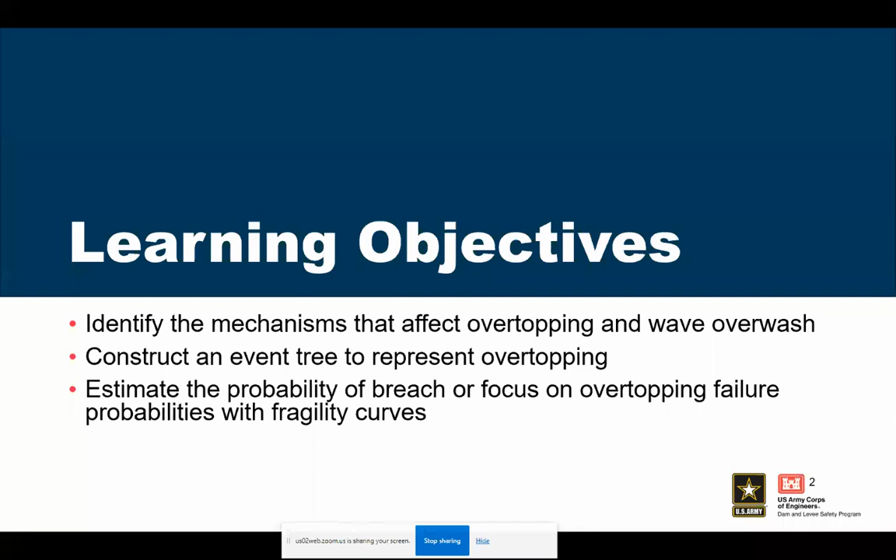So failure of dams and levees due to overtopping, it's a pretty common failure mode. This indicates it composes about 30% of dam failures in the US. But I think internationally, that's probably closer to 50%, at least according to what Robin Fell put together based on a bunch of dam history back in the late 1990s.

So we'll discuss key factors such as overtopping depth, duration, and dam materials. So embankments that have overtopped by a few inches to any more than a foot, or about 0.3 meters, have performed well, but others have failed quickly. And that depends again on the depth of overtopping, the duration of overtopping or overwash, and the materials that the dam is actually made out of.

So many older dams and levees have been designed for floods that no longer really represent a remote flooding event, and design estimates have increased. Everything in engineering progresses and moves on with time, and hydrology in particular can be affected by that. So back when things were designed in the 60s, the 70s, sometimes as we get more data about actual weather events and floods, we understand the likelihood of loading better. And so that means that some of these dams may be under-designed and may be more likely to overtop.

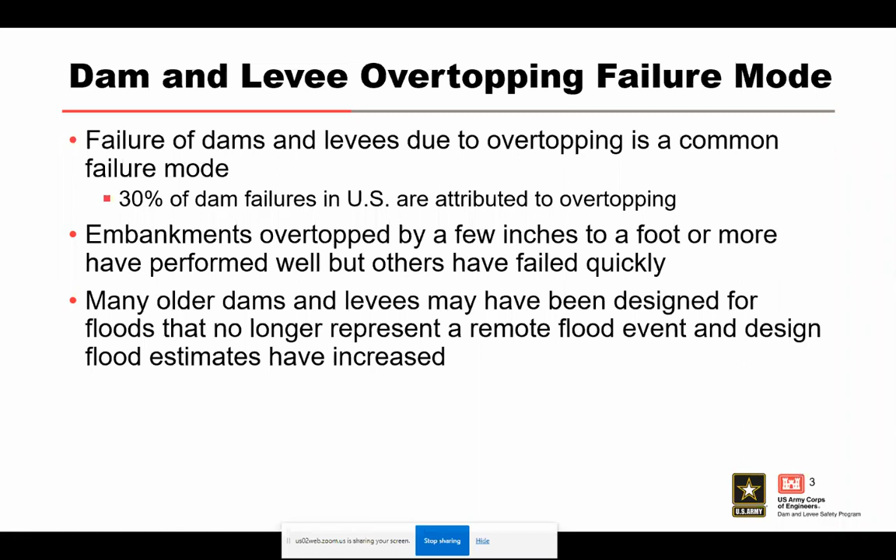So let's talk about a couple of case histories here. This is Lake Delhi Dam near Delhi, Iowa in the United States. It failed on July 24th, 2010. One spillway gate was not operational during this event. So you can kind of see it—let me get my laser pointer here. You can kind of see right here, these two gates are up, but this gate is closed.

And so the dam also underwent internal erosion. We're not really sure about the specifics of that, but it also overtopped this section right over here, a 200-foot portion of the earthen embankment and the roadway, which led to breach and emptied the reservoir.

So this was not a huge dam, it was about 4,000 acre feet—I should have had those numbers in cubic meters, but it's a small dam, relatively speaking. But you can see as this area was overtopping here, kind of, you can see another view of it overtopping here. And this is the same section after it failed. So you can see there was a pretty significant erosion event here. No life loss occurred, but about 8,000 people were evacuated from the downstream area.

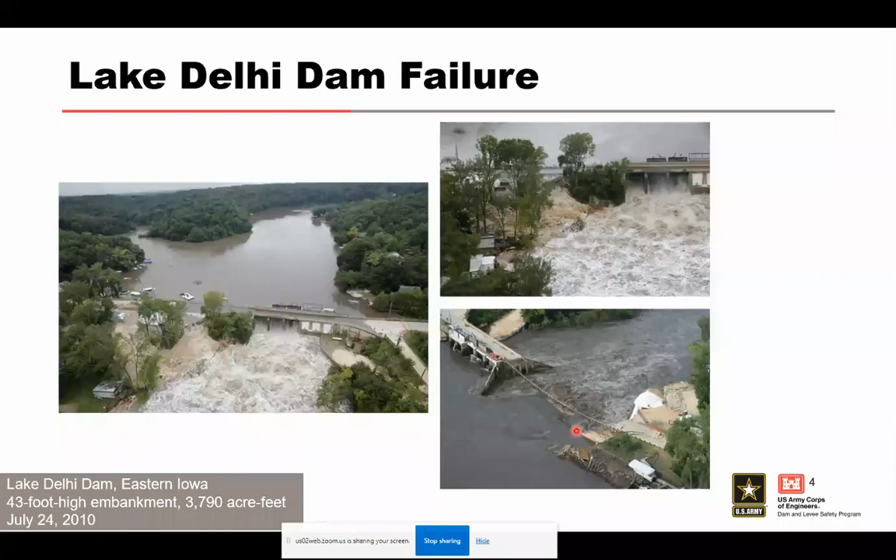This is Auburn Cofferdam. So this was a cofferdam actually constructed in California to build a concrete dam that never actually got built. In early February 1986, 10 inches, or about 25 centimeters, of rain fell in the Sacramento region in just 11 days. And it melted a lot of the snowpack in the Sierra Nevada mountains and caused a huge flood to pour down the American River.

So rising water overtopped the cofferdam near the right abutment, kind of right here, creating a waterfall, or an erosive overflow that quickly eroded into the structure. Although the cofferdam was designed with a soft earthen plug to fail in a controlled manner, if any such event were to occur, the structure eroded quicker than expected.

So breach outflow surged downstream into the already spilling Folsom Lake, which is another dam less than a mile downstream, deposited the cofferdam debris in that lake, and raised the lake level very quickly. Folsom Dam then started to move water through the spillway, and outflow reached 134,000 cubic feet per second, which is a ton—I should have got that into cubic meters per second, but it's a lot, which exceeded the design capacity of the levees through Sacramento. But the levees were fortunately not overtopped, and severe flooding in the city was averted by a very close margin.

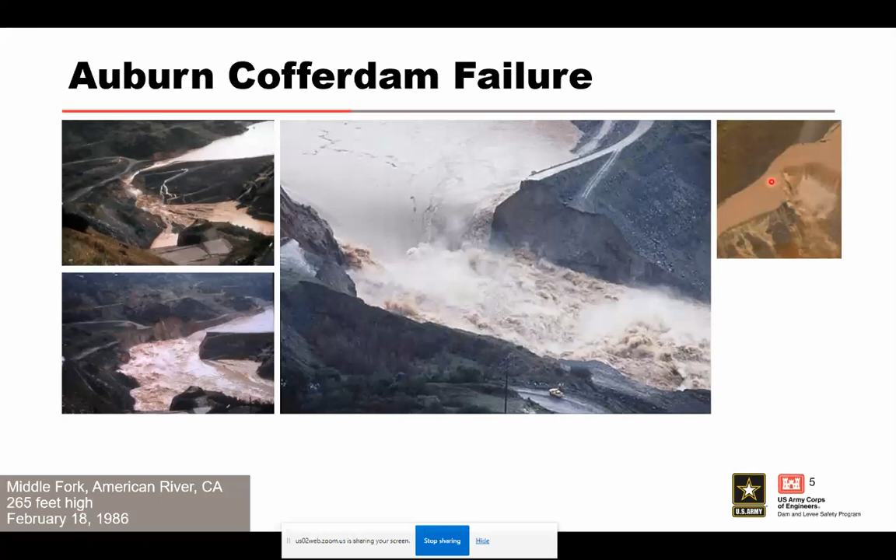And I think this is an aerial view, the remnant section here, and the actual flood. Pretty significant failure here. So this is Taum Sauk Upper Dam, an upper reservoir of Taum Sauk.

So it's a pump storage dam. Essentially water doesn't flow into this naturally. It's actually pumped up into it from a stream offsite that's used for water supply for the people who live in the area. It was overtopped when water continued to be pumped from the lower reservoir after the upper reservoir was full. So you got to ask yourself, how does something like this happen? It was a pretty crazy series of events that led to this, and it eventually led to the catastrophic failure of a triangular section of the reservoir wall, as you can kind of see right here and over here.

The failure was a result of a combination of design and construction flaws, including continuing to operate the dam when the primary system for gauging the water level was known to be inaccurate. Specifically, the gauge pipes, which measured the water level, had become detached from the reservoir wall, so they were kind of moving around. That moved the fail-safe secondary gauging system above the actual height of the dam to avoid false positives, which would cause a premature stop of pumping into the reservoir, and operating the dam in an unsafe manner by routinely overfilling the reservoir. There was no overflow spillway in the original reservoir, so there was no place for the water to go once it did overtop.

After this thing breached, no one was killed, but a downstream park superintendent, his wife, and his 3 kids were swept away while still in their home. So this is a really remarkable thing. We never would have thought that that was able to happen, but literally the house was picked up from its foundations and floated away while it was still intact. And so no one was killed, luckily.

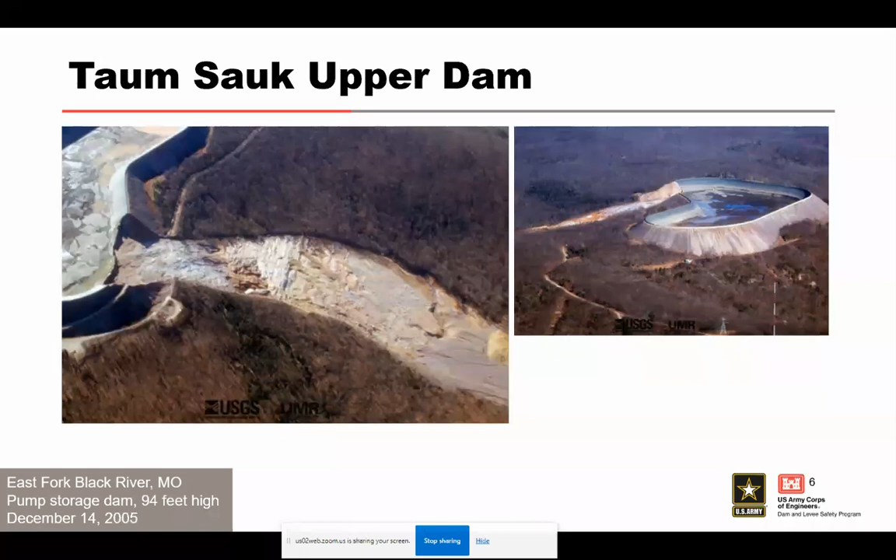Here is another one. This is Rainbow Lake Dam failure. It failed in September of 1986 due to extreme rainfall in central Michigan in the United States. So Rainbow Lake Dam failed due to extreme rainfall.

The dam was 46 feet tall. So that would be, what would that be? That'd be like 12, 13 meters, maybe 14 meters. And it's about 800 feet long, or let's say about 270 meters long, and had a 10-meter wide crest with 4-to-1 slopes and a rectangular drop inlet spillway, but no emergency spillway.

It was constructed of well-compacted sandy, silty clay. So that's an important part of this. There was sand in there, there was silt in there, which are erodible materials. But there was also clay in there, which has a lot of erosion resistance associated with it, and a little bit of coarse gravel. But eventually the dam failed after being overtopped for 14 hours, with a max overtopping depth of about 1.5 to 2 feet, or somewhere in the zone of about 0.4 to 0.6 to 0.7 meters.

An eyewitness stated that the erosion, which resulted in the breach and failure of the embankment, started in an area where vegetation cover was sparse or non-existent due to the presence of a road or trail angling down the downstream side of the embankment. So that's important to note. The grass cover on embankments provides a really robust armor for the embankment itself. So if you look close at this photo right here, you can see some of these erosion rills taking place. You can see water kind of flowing down through here. And we'll see some more of that here in just a minute.

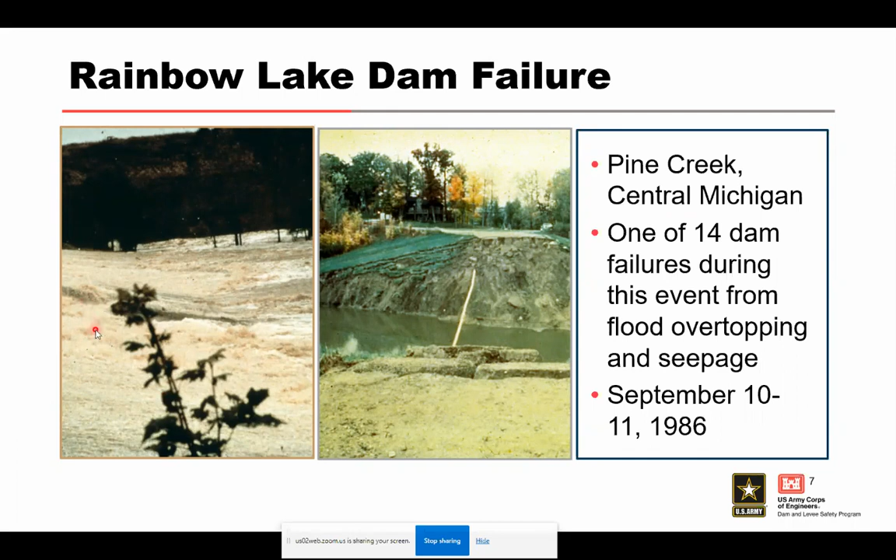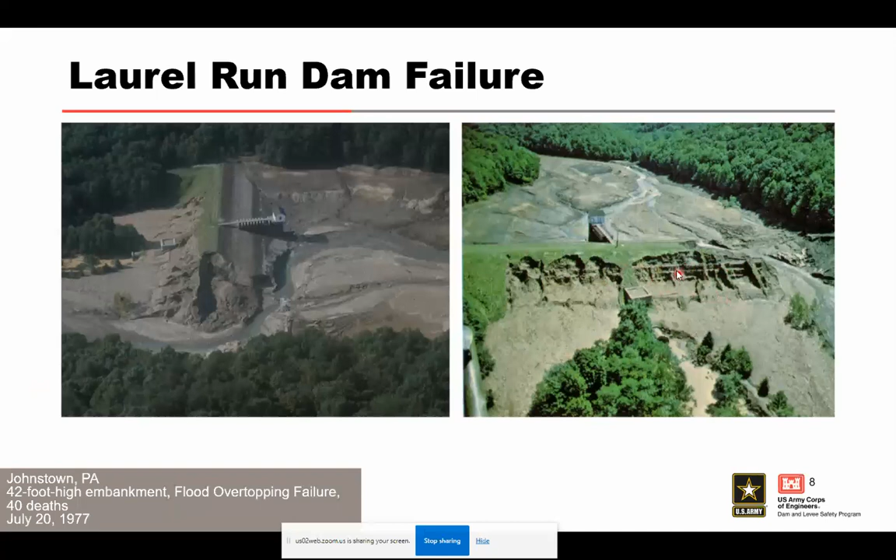Note the lineations on the downstream side of the dam. So that's what these kind of weird things are right here. Those are actually thought to be due to crib walls that made up the original dam prior to placement of additional fill later in the life of the dam. So this was the original dam, then they placed a larger dam over top of it. But anyways, just kind of interesting.

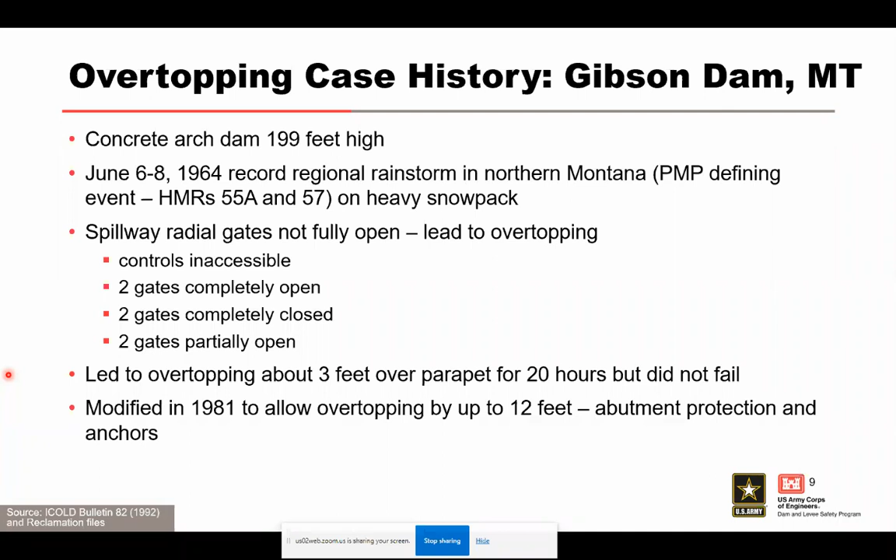So the spillway radial gates, they were not fully open, and they led to overtopping. The controls weren't accessible. 2 gates were completely open, 2 gates were completely closed, and 2 gates were partially opened. It overtopped by about 3 feet over the parapet wall for about 20 hours, but did not fail.

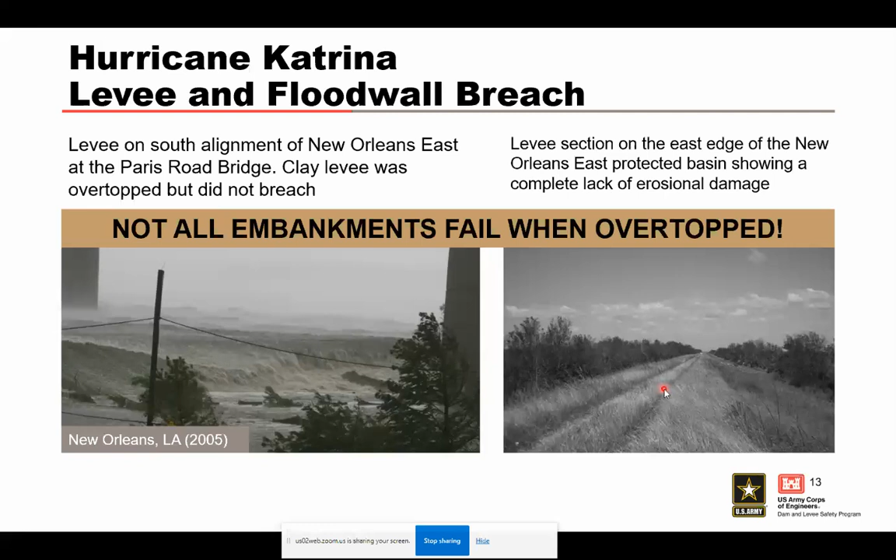So this is a clay levee with a good grass cover. It looks great. No damage at all. I'm not sure if it was overtopped by quite the same amount, but this was overtopped, and for a long time. So interesting to see how much the materials that we can make these levees or dams out of, and how they're compacted, change the likelihood of failure.

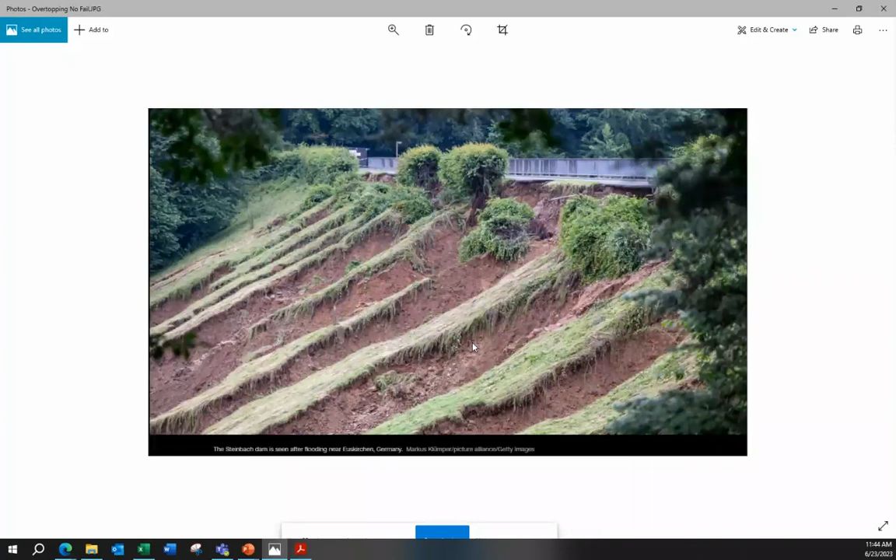So this is pretty severe. And note that it's not just in one location, it's in multiple locations. So we'll talk more about that as we talk about the specific way that we would try to assess the likelihood of failure. But it's good to note that over an embankment, failure may not just happen in one location. It could happen in multiple locations. Something to keep in mind.

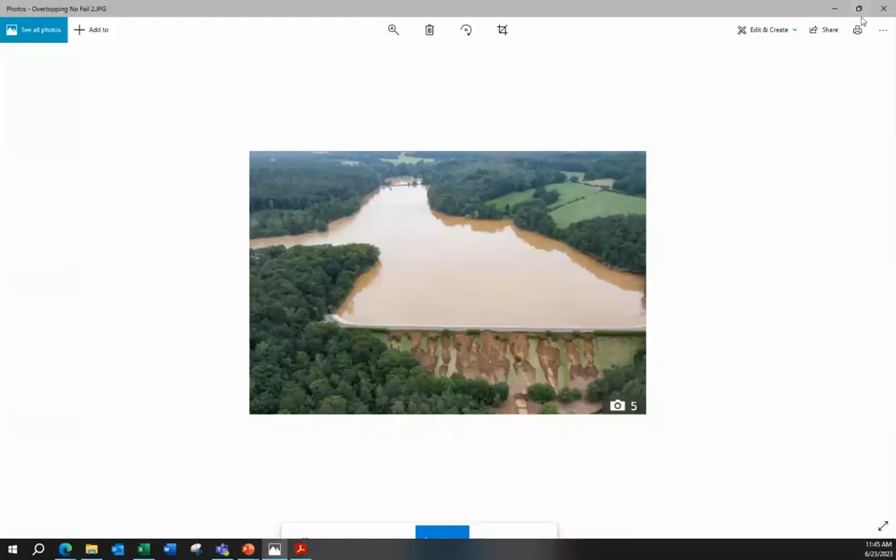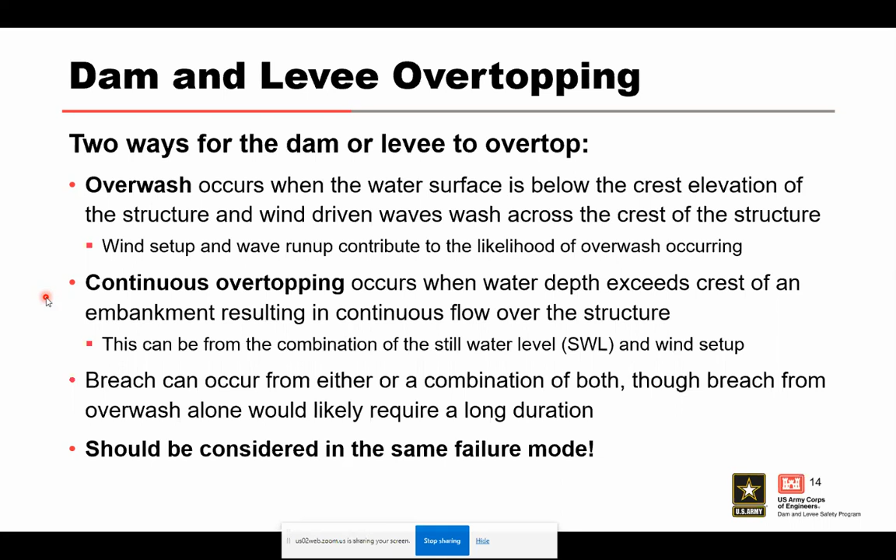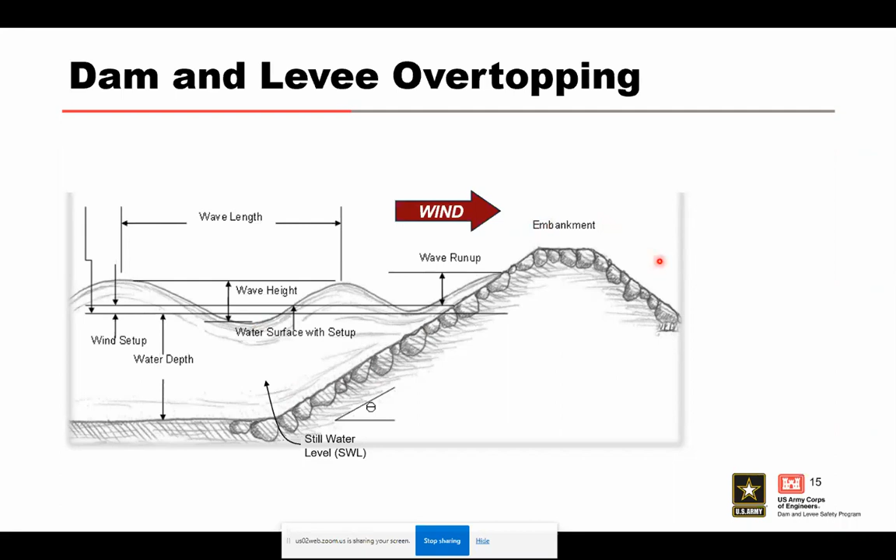Okay, embankments and concrete structures, depth of overtop. So overtopping depth, duration, and type of structures are critical to evaluate an overtopping potential failure mode. Most embankment dams and levees would not likely withstand sustained overtopping of a foot or 2, or 0.3 to 0.6 meters or more, without a high probability of failure. That greatly depends on a lot of things, but that's a good rule of thumb.

Most concrete dams, however, can likely withstand a certain level of overtopping due to the robust nature of the structure itself. It's made out of concrete. It's likely got reinforcement in it, perhaps. The concrete itself has a lot of erosion resistance associated with it, and the rock foundation that it is built upon. Some dams may be vulnerable due to jointing and fracturing in the rock foundation. So as water overtops this concrete dam and cascades or falls down, it might actually erode the rock that the dam sits on, which would be bad.

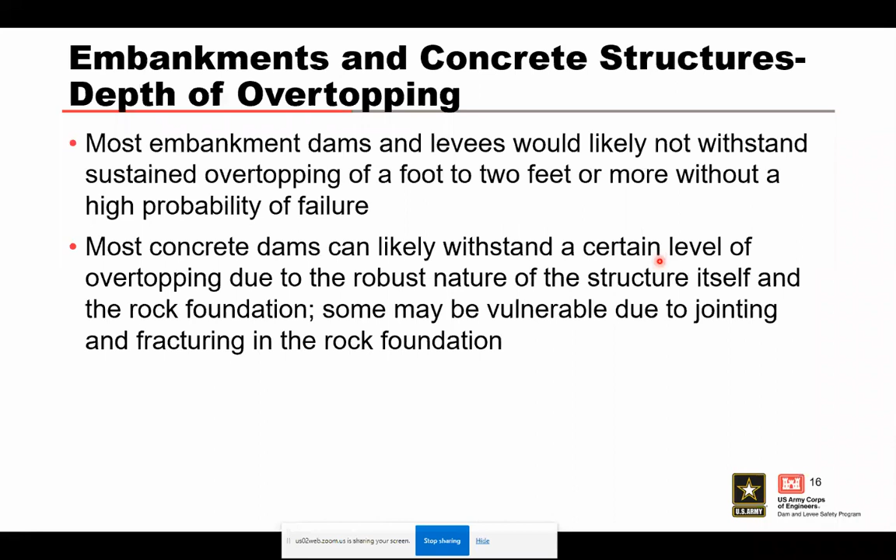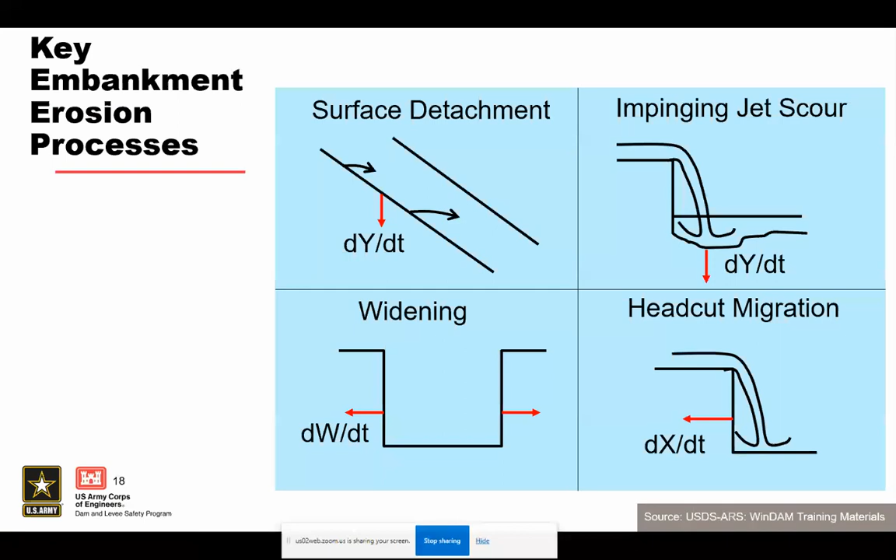All right, so here we have a series of photographs which illustrates these erosion processes. So this is an erosion test. I think it's done by the NRCS. ARS, excuse me. And so what they essentially had was they had built an embankment and they diverted some water from a stream that was nearby and started to overflow this material.

And so this is essentially far into the process here, where water started to overflow the embankment section in this lowered section right here. And you see that not only have we lost our surface materials, our grass, our turf, which provides protection for the embankment, but we also see this series of stair steps, where each one of these is a head cut that has formed.

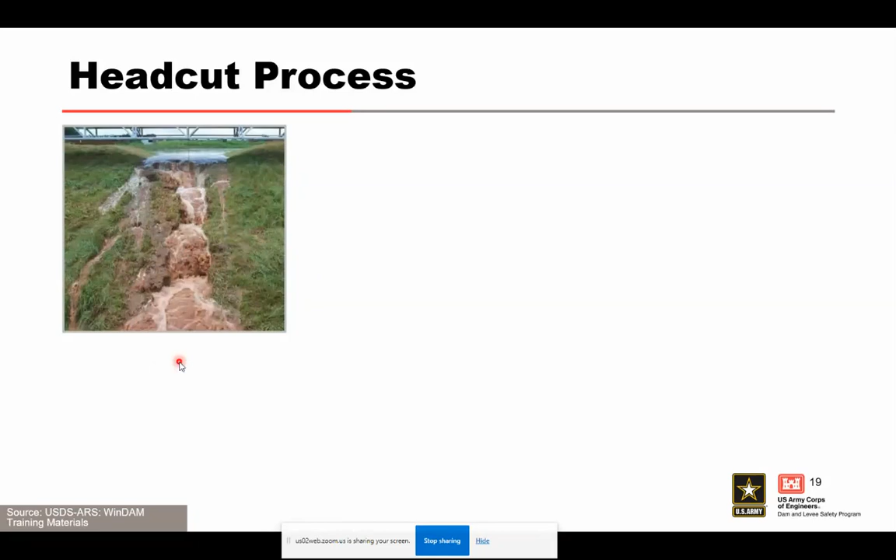So it looks like we have one head cut, two head cuts, three head cuts here that have formed at multiple locations on the downstream slope. As this progresses, these head cuts start to come together and make one large head cut and continue to move upstream. And you can see that we are also starting to widen this breach out.

So why is this happening? This is probably happening as we continue to undermine; the water's falling over here. We're undermining the soils right adjacent to where it's actually striking the bottom of that waterfall area. It's also undermining the soils at the bottom of these side slopes. And these slopes are probably falling in in chunks and then being washed downstream. And so this head cut is now migrating upstream towards our water source.

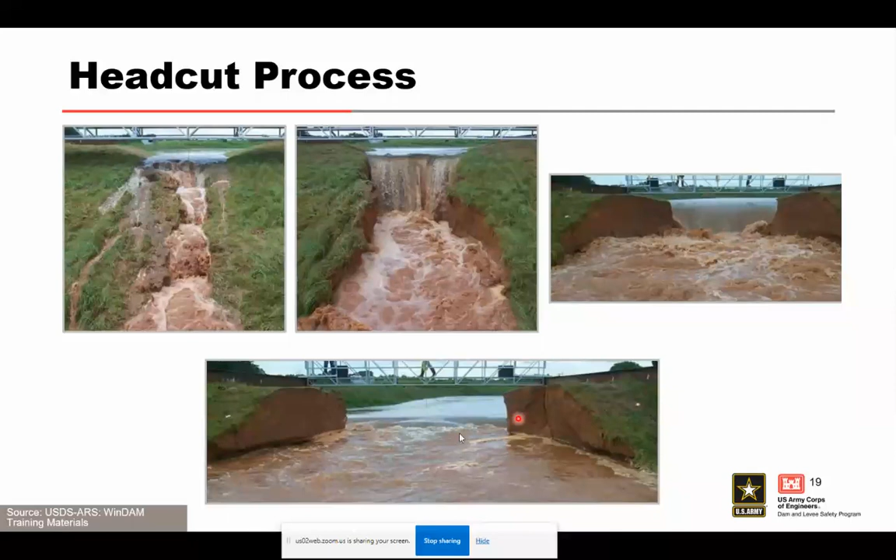And here we see it's continuing to move upstream. We've actually gotten past the crest, so now we're into the upstream slope. This thing has widened out considerably, and then eventually we have a full breach. We did have some head difference from upstream to downstream, but now there's very little head difference. We have a full breach.

So let's talk a little bit about crest elevations. Accurate elevations across embankments, dikes, and levee crests are needed to evaluate overtopping. Recent surveys need to be performed to help identify low spots and areas vulnerable to flow concentrations.

These things change over time, and it may vary longitudinally, either through erosion events or settlement, which is a big one. Consolidation settlement of the embankment, regional subsidence due to mineral extraction or groundwater withdrawal, particularly in areas where there's a lot of soft soils that are recently deposited.

Surveys of embankments, either levees or dams, are recommended to determine the crest elevation and identify low spots. There's many ways to do that these days, either by typical survey with a rod and total station, or LiDAR where it's available. Lots of different ways to do that. This helps identify where overtopping is likely to occur first.

This is important because you want to understand where your low spots are, so that if you want to intervene, and you know overtopping is going to happen, you know where to go to pile up some sandbags or something like that to decrease the chance that overtopping actually occurs. But it also helps when you're assessing the likelihood of overtopping, so you know where to look. Do we have poor grass in this area? Is the embankment slope in good shape in this area?

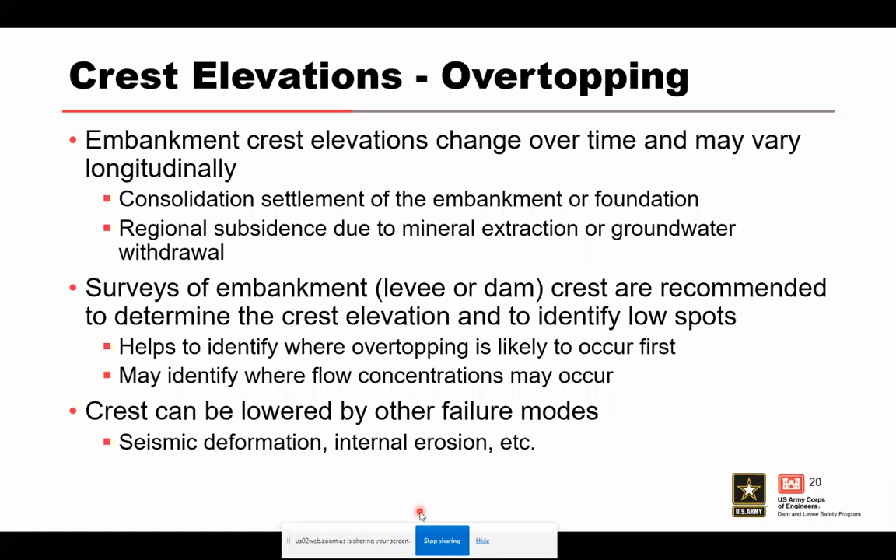Okay, so levee overtopping. Let's talk a little bit about the hydrologic hazard curve, or the frequency of overtopping, which is the primary factor for this potential failure mode. That's really what drives this.

There are several factors that may increase water surface elevations. These can include debris blockage, particularly of a spillway. If debris moves into a spillway, that's going to inhibit our ability to move water out of it. It's going to cause water behind the dam to rise faster, and we're going to overtop prematurely.

System operations changes and tributary inflows. So if we have dams upstream on our river or on other river tributaries, and they change how they decide to operate and decide to let more water through sooner, that could increase the likelihood of overtopping.

The original modeling technique - if we did something 50 years ago, likely our techniques or our ability to assess the likelihood of overtopping or the likelihood of a flood at all has probably changed. There's a change in understanding of the potential inflow. We have a better period of record. We understand how rainfalls and floods happen better in particular areas or on rivers, or there's a change in estimated frequency, so overtopping may be more likely to happen.

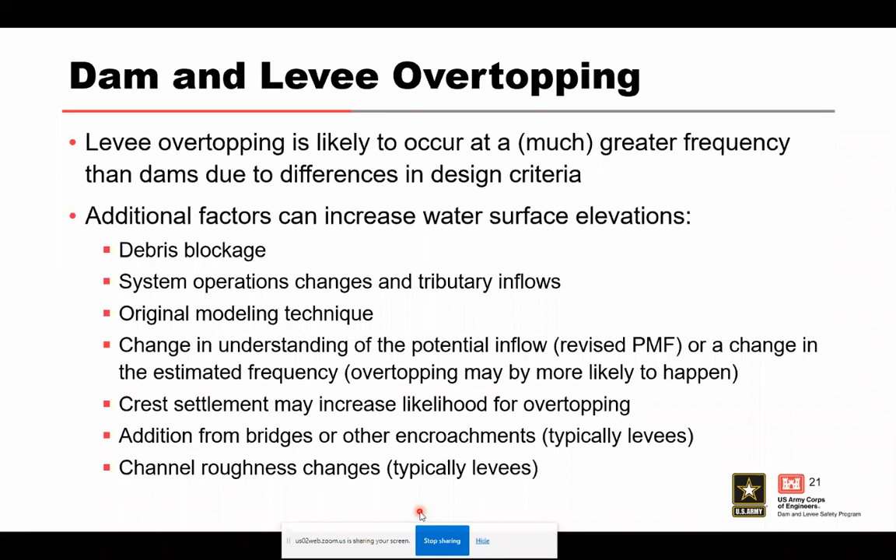Some additional factors influence the likelihood of failure given overtopping. The depth and duration of overtopping is huge. We said before, if there's like 0.3 to 0.6 meters of overtopping, that's a bad deal. Some dams may fail before that. Some dams may actually stand up under that type of overtopping, but it's rare.

Camber or low spots on a dam or levee crest may concentrate overtopping flows. Downstream materials, slope protection, changes in slope or protrusions matter too. If we have really erodible material on the downstream side, once we start to overtop that dam, it's going to erode away rather quickly and cause that thing to start to breach more quickly. If there's slope protection, like riprap, large rock, or even concrete aprons or slope paving, that's going to be a game changer.

Changes in slope and protrusions matter. A lot of times erosion may initiate on the downstream side of a dam where there's a change in slope, because the flow regime changes, velocity changes, and that can increase the likelihood of erosion at those locations. Protrusions, like telephone poles, will cause water to scour around them like a bridge pier. Same if you have guardrails along the crest of your dam. Those can be huge and need to be considered when thinking about the likelihood of overtopping, especially if there's a road on top.

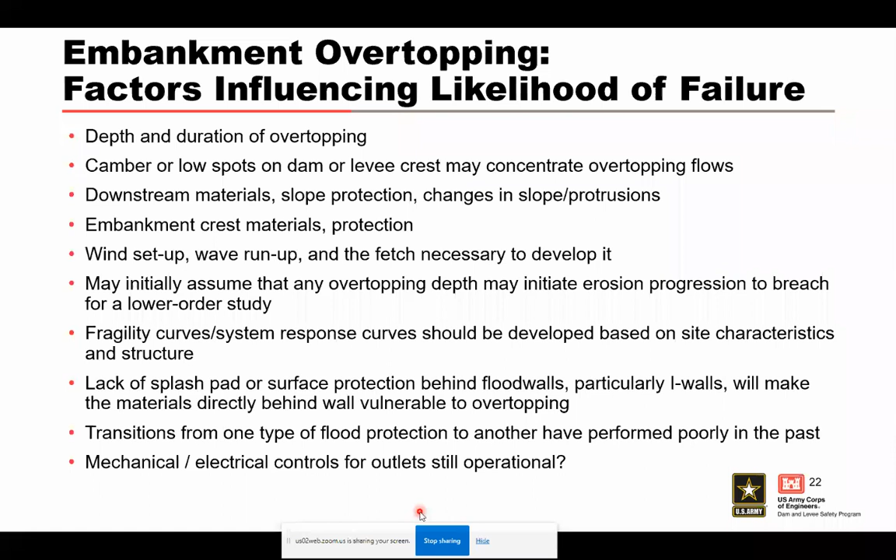Embankment overtopping event—this is where we start to break this overtopping failure into specific events that we can actually put a probability to, or at least think about in a very controlled way.

The sequence of events leading to an embankment failure from overtopping goes: a storm occurs and overtopping initiates. We'd also consider that wave overwash initiates probably before overtopping does—so we have water overlapping this levee, and eventually as water continues to rise, we start to overtop constantly. Once overtopping or overwash has initiated, the vegetation or slope protection has to be removed to progress this failure.

That's typically some sort of grass, or if it's not as much of a maintained levee, maybe there's natural vegetation there. You have to consider how likely it is that material is actually going to be removed. If it's smooth, uniform, thick grass, that may have a lot of robustness to it. If it's woody vegetation that may concentrate flows, then maybe that's not going to help—maybe that's going to make things worse.

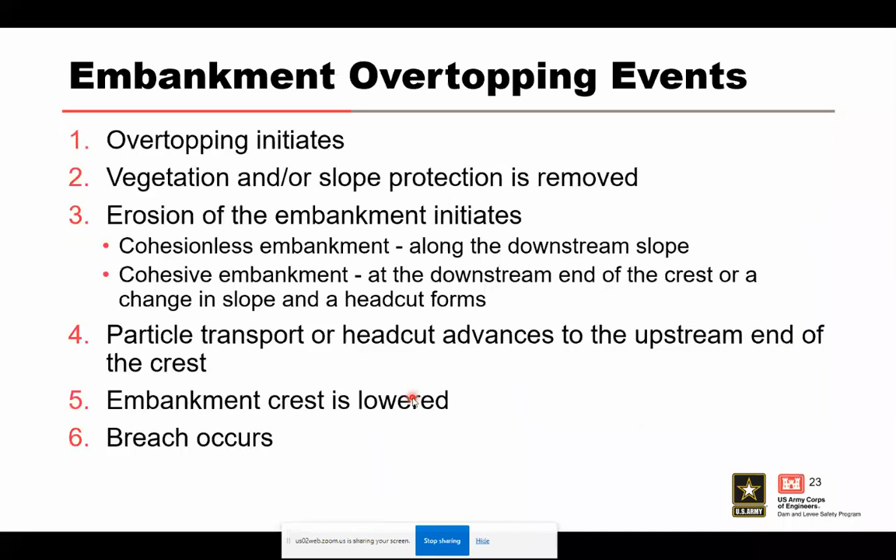Next node: so once overtopping or overwash initiates, then surface protection of the downstream slope fails and head cut initiates. So these two things got put together. We had them as separate events here, but really, once we lose that surface protection and we start to initiate erosion of the actual soil of the embankment itself, we immediately start to form some small head cut. So we put those together because it's almost like the same thing.

So once we initiate that head cut, then it's all about that head cut starting to deepen. It starts to get bigger and it starts to move upstream. And once it moves upstream and hits that upstream crest, that's an important point, because if it goes beyond that, it's going to start to lower that crest and we've initiated breach. So we can put a likelihood to each one of these events, and when we multiply all those likelihoods together, then we have an estimate of the failure. That's the thinking behind this.

So predicting embankment overtopping, breach, and breach parameters—this whole presentation is part of our best practices series, which is what that chapter C1 is. This is available on the Risk Management Center website, which is free for everybody to go and take a look at. I encourage you to do so. There's a lot of good stuff on there, including some tools to help you understand the likelihood of each of these nodes better by doing some screening analyses.

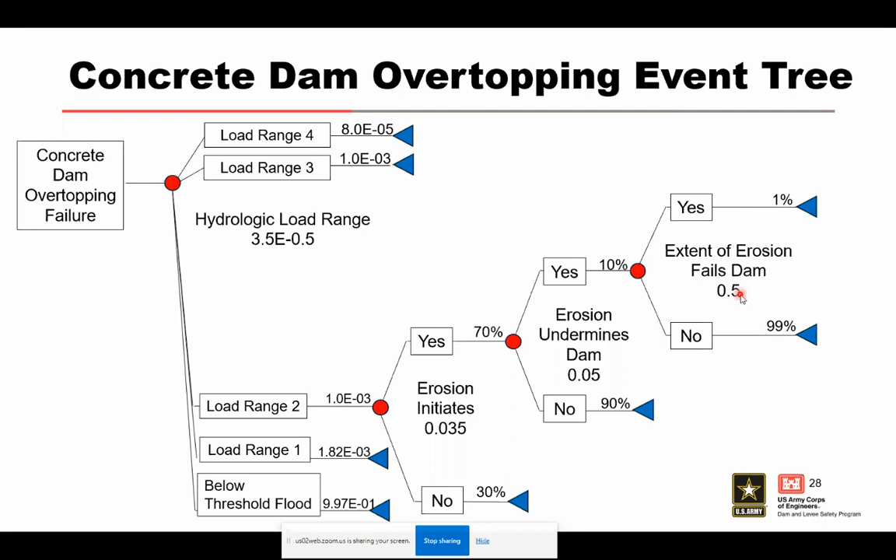All right, let's run through some uncertainties and different inputs into this analysis that we're doing here. So the hydrologic hazard, what's the likelihood that this thing gets loaded by some water and it actually overtops at all? The size and shape of a flood hydrograph may vary depending on the peak and volume considerations and variations in the type of flood. Is it a thunderstorm, or is it a rain-on-snow flood event? Or is it a hurricane event? Or is it some sort of atmospheric river coming in from the coast?

Hydrologic hazard assessments may have been based on short records or anchored to design floods. We prefer to have long periods of record with a lot of data, but that may not always be available. There are large uncertainties in flood hazard due to lack of data or reliance on older analyses. I'm sure a lot of you know our ability to do these hydrologic analyses changes pretty regularly, and we get better at it, so that can change over time.

The peak and volume of a flood with the same return period as the original inflow design may have changed over time. Once we understand how much water is going to come into the system, how do we route that flood for an embankment? How do we turn how much volume comes into the system into an actual height on our dam? What's the starting reservoir elevation, reservoir operations at the time, or is it going to be misoperated? What's the spillway discharge, and have there been any modifications to the spillway since it was created or since that analysis was done?

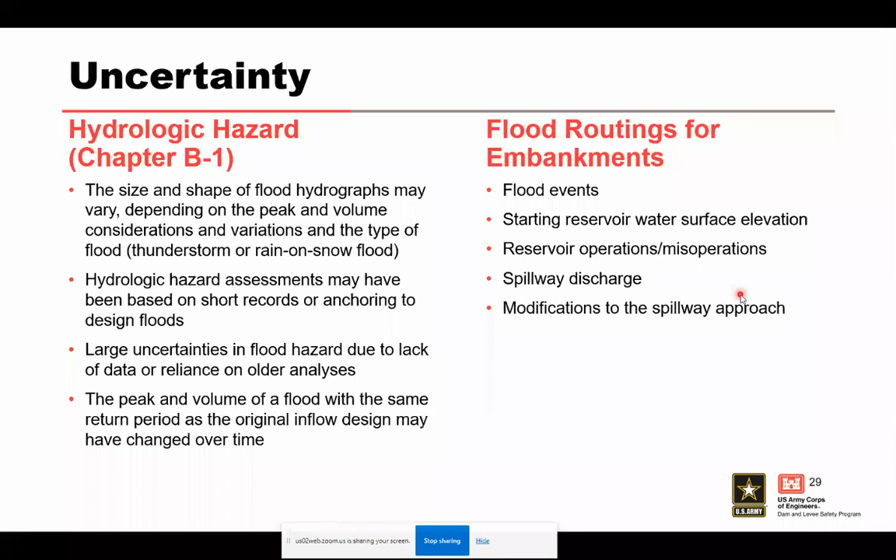Initial antecedent reservoir water surface elevation. Starting reservoir water surface elevation can be a critical input for flood routings. The default elevation may be the top of active conservation storage, or top of flood control, essentially at the base of the spillway or at the spillway sill. But historical reservoir level data may indicate the reservoir is at this level only a small percentage of the time. So are we being overly conservative? Do we want to be overly conservative? If a starting reservoir elevation is significant, flood routing should consider this variable, and results incorporated in the event trees.

Consideration for starting reservoir elevation should also include time of the year and when the flood is likely to occur. Is it in the spring? Is it in the fall? And is that starting elevation going to be different in those two times?

Reservoir operations, misoperations, assumptions regarding reservoir operations for flood routing should be evaluated for reasonableness. Like, will we actually do that? If a gated spillway operation will exceed downstream safe channel capacity, will those operators actually operate them? Will they choose to flood people downstream? If not, then they may overtop and things may get even worse.

Gated spillways may be vulnerable to one or more gates failing during flood. We saw a couple of case histories of that. Due to mechanical failures, loss of power, gate binding, perhaps the operation controls are underwater. Sensitivity routings can evaluate variable assumptions. Again, sensitivity analysis is always a good idea.

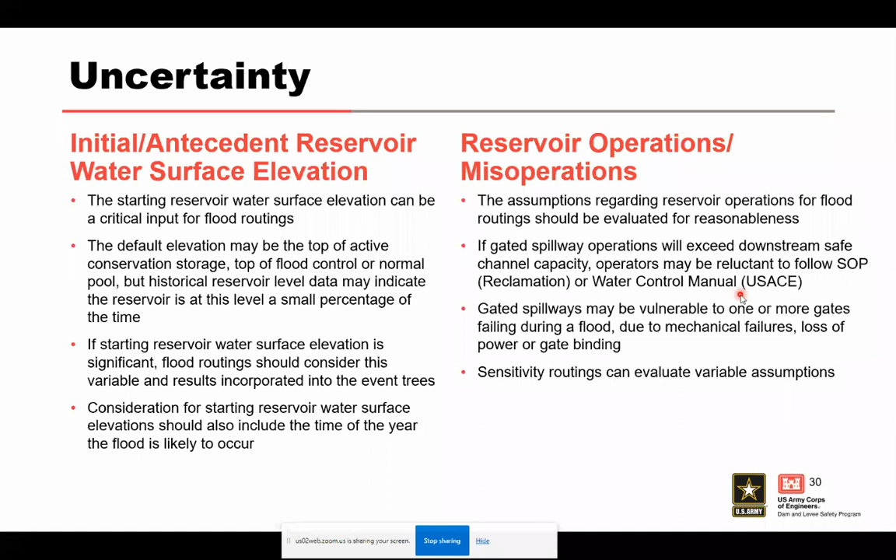Spillway discharge. Those discharge curves used in flood routings are often based on idealized discharge curves, which may not happen in reality. Approach conditions that are less than ideal may reduce the discharge from what was assumed. Debris can move into the spillway and block it. For a gated spillway, flow will vary at a given water surface elevation depending on whether free flow or orifice flow conditions exist. Can we move that Tainter gate all the way out of the way so we can just get free flow?

Embankment performance during overtopping. You need to be careful when we're considering overtopping load partitions. That means, do we want to assess overtopping at 0.3 meters, 0.6 meters, and 1 meter? Or can we just assess it at 1 and have a good understanding of the likelihood of failure? Overtopping duration is a key parameter. It's a big difference if something overtops for 2 hours versus 20 hours.

And then the surface protection. Is it grass? Is it riprap? Is it bare soil? If it's grass, how well is it taken care of? Are there bare spots all over the place? Embankment zonation. Is it a clay core with a rock shell? That's pretty good. Are there changes in the downstream slope where changes in flow could occur and erosion may initiate there? What's the erosion mechanism? Is it head cutting or surface erosion? Again, probably usually going to be head cutting.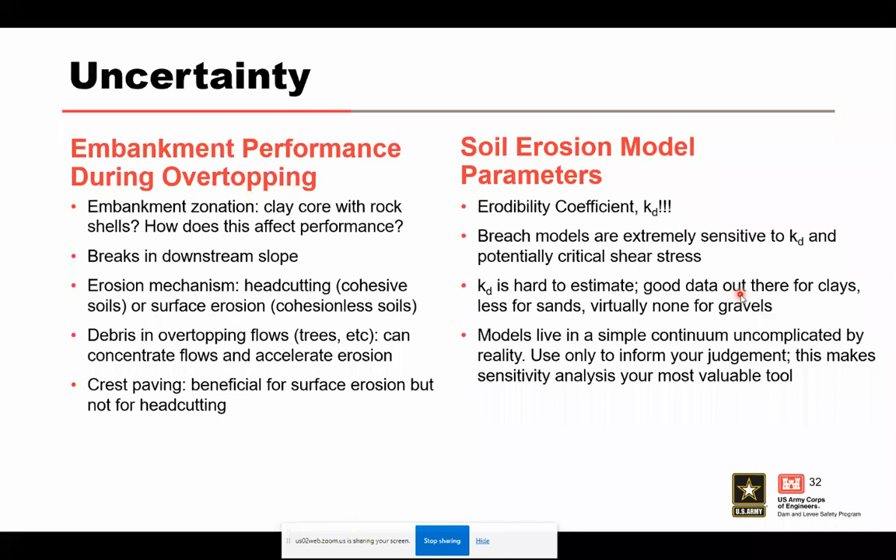So use models to inform your judgment as a professional, as someone who has experience in dealing with erosion of soils and stuff like that. Use these models in that way. They're extremely sensitive to KD and potentially critical shear stress. KD is hard to estimate. There's good data out there for clays, less for sands, almost none for gravels. We're trying to work on that through some research, but it's tough. And again, these models live in a simple continuum, and they are nowhere near as complicated as reality. So just use these to inform your judgment.

All right, almost there. Key takeaways. Overtopping flow and wave overwash could be potential failure modes for both dams and levees. Consider them together. The specific erosion mechanism depends on the material the embankment is composed of, cohesive materials, cohesionless materials, and whether or not it deals with head cutting or sediment transport. A combination of both can occur.

You're probably going to be dealing mostly with head cutting because it takes a small percentage of cohesive materials to change that mechanism. Somewhere 5 to 10% fines, and you're probably in head cutting territory. Depth and duration of overtopping are key factors. Erodibility of earth embankment material is a key factor, and erodibility of the rock foundation is a key factor for concrete dams.

So we can break here and answer some questions. I have a few more slides about a case history, but maybe this is a good opportunity to address some questions before we go into that.

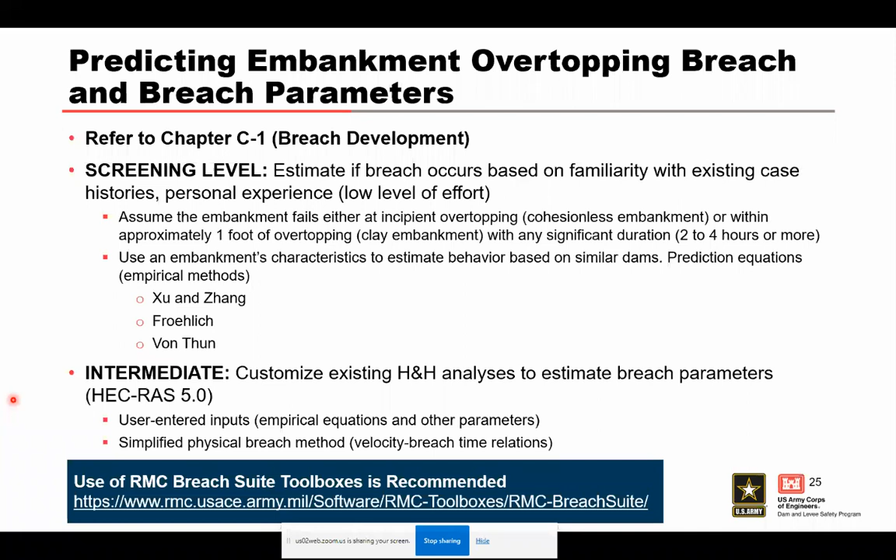On the flip side of that, we have asked one of our universities here in Colorado to run tests to basically see how much water they can put over a grass slope before we start to lose that grass. And so we get an understanding of, okay, we can put 1,000 cubic meters over a really good grass surface before we start to lose it. And then we compare that to our estimate of the volume of water going over a levee during the storm, and now we can start to understand how likely it is that we lose that grass.

Wave overtopping really drives the risk on levee systems for various reasons. So when assessing a dam, we may run breach analyses to estimate constant overtopping, but we may use judgment to say it's probably going to be a little worse because there's going to be some wave overwash before and after that. That may require judgment to combine those two things on a dam.

Okay, thank you. Another question. It seems to me that protection of the downstream face is like a parachute in the context of dam failures. Should we start demanding this type of protection for all dams, regardless of size?

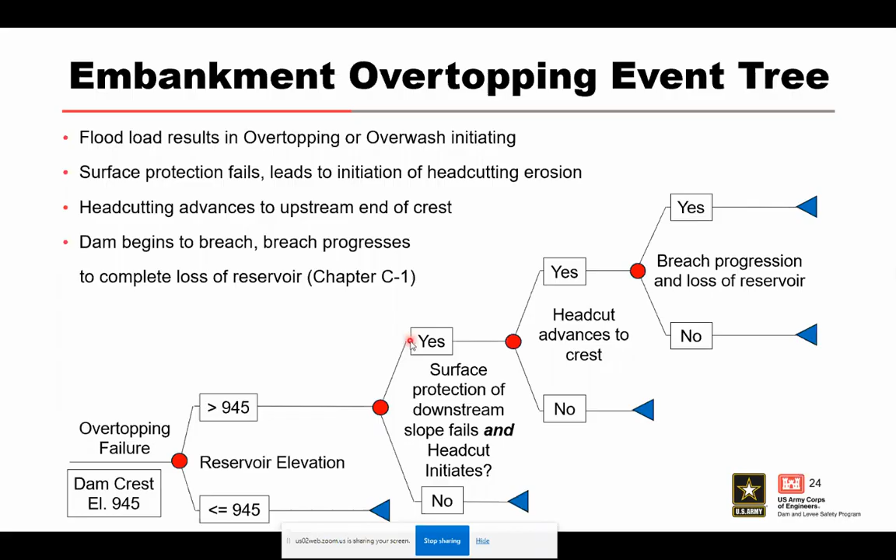Simulate numerically? Yeah, that's right. So event trees - you would create a unique event tree for each potential failure mode, and then use each event tree to assess the likelihood of that potential failure mode. In this example, we created an event tree for overtopping. We got together as a group of people with experience looking at overtopping, talked about it, and in a quantitative risk assessment we would provide an estimate of event 1, like a probability - say a 60% chance of it happening. Then for event 2, if event 1 happened, what's the likelihood of event 2 happening? Let's say 40% chance. And given that all events occur, what's the probability that event 3 happens?

Or the chance that number 3 happens? That's 90% or something like that. So in a quantitative estimate, we would do that.

If we were doing something a little bit more qualitative, which is a simpler analysis, then we would use these event trees to help guide the discussion of how likely this failure is to occur. So in this particular case history, we were doing a quantitative assessment, so we used this event tree to help guide the discussion.

And then we all together elicited. So I have 1 here repeated over and over again - this is actually elicitor 1, elicitor 2, elicitor 3, 4, 5, and so on. We had like 10 people here eliciting, and this is what they all thought.

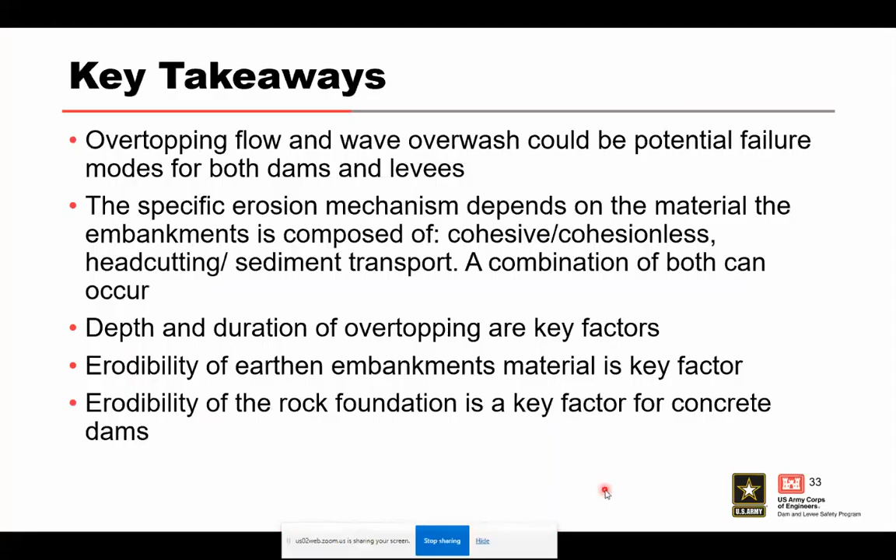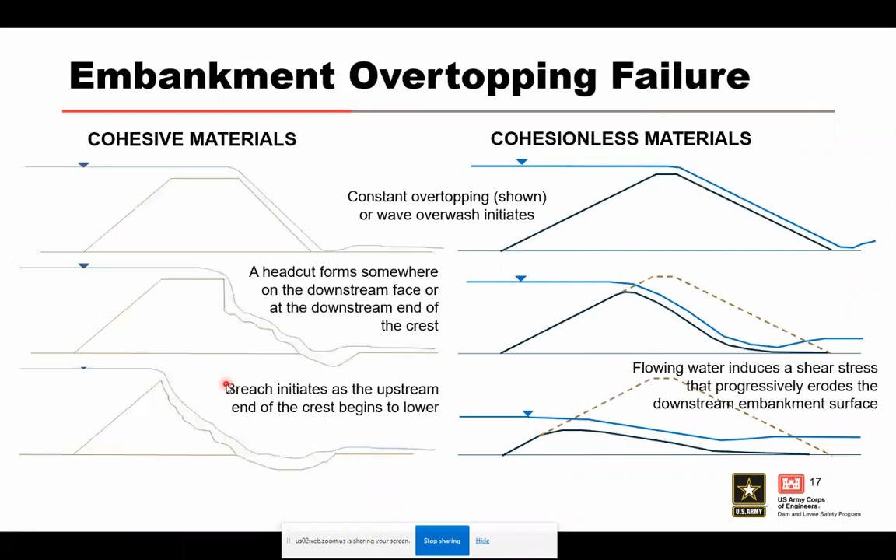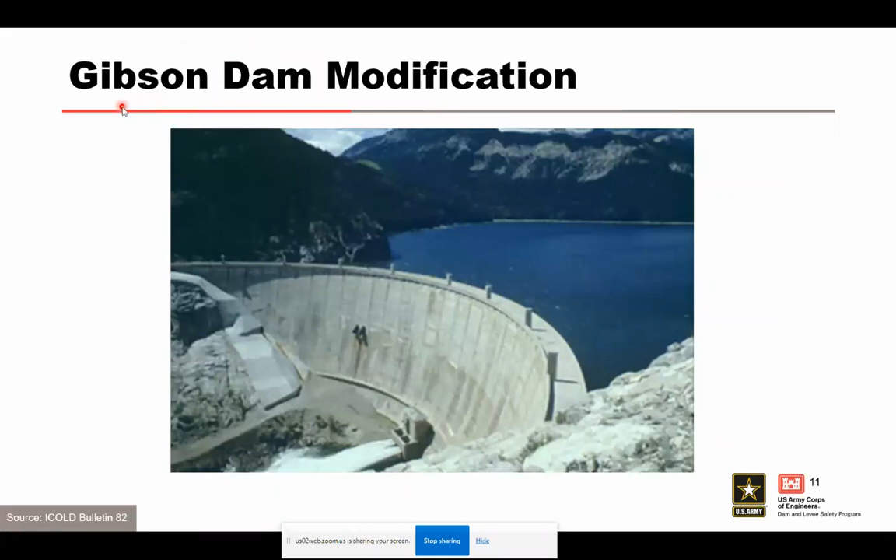And the last question: where do you get the probabilities you use in the event trees? It's an excellent question, and so this goes back to professional engineering judgment, based on your schooling, your experience with these types of things before, your experience in seeing and trying to understand the erosional process.

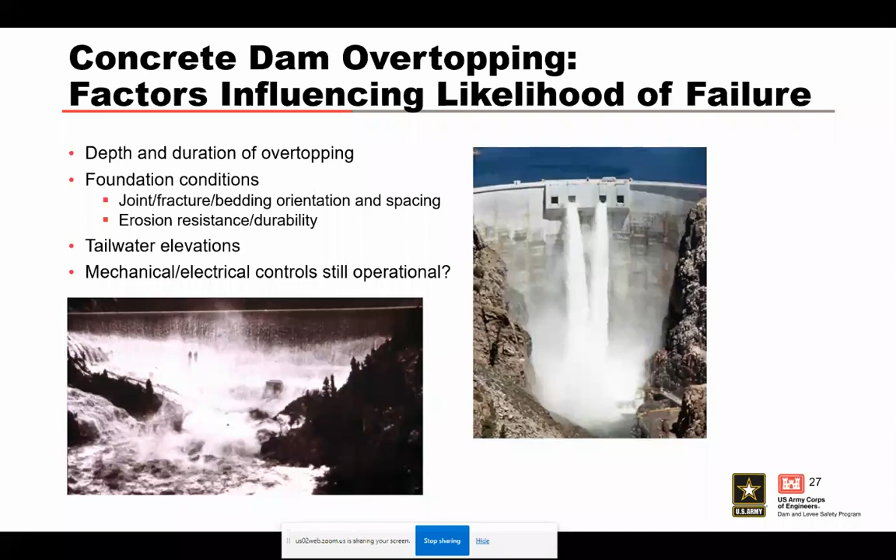But judgment can be informed by some of these breach models that we talked about before. We can run some of these WinDAM analyses to help us understand - for our dam, based on our breach model, we don't think half a meter will fail it, but a full meter of overtopping will likely fail that dam. So we start to understand the likelihood of failure using these tools to put into these event trees and give us our nodal estimates.

So anybody can do it. Anybody can provide these nodal estimates or likelihoods of failure, but it's good to study up. It's good to understand all the site characteristics of the specific dam you're looking at, and it's good to run some sensitivity analyses or other analyses in general to help you better understand how these things will perform.

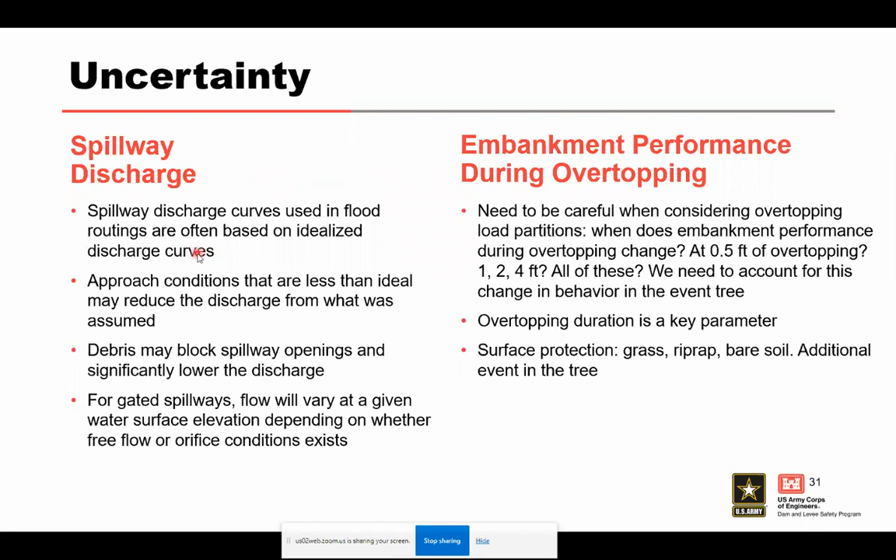But I want to talk about Lopez Dam, which is a small dry dam in the United States. Let me bring this back up here.

The primary risk driving potential failure mode was overtopping for us. The frequency of overtopping is relatively frequent—I think it's like a 1 in 10,000 year event, and potential life loss and economic consequences are very high. This is directly upstream of a major US city in California, so it was important for us to understand the consequences of failure.

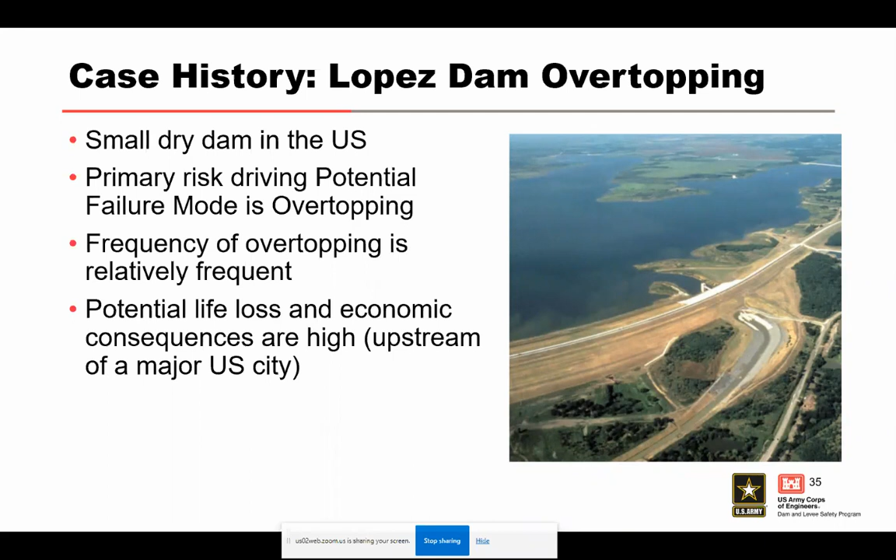Here's a better picture of the dam, sorry about that last picture. It's a zoned earth dam, and it's a dry dam. There's another dam upstream of it which helps regulate the inflow. What we're looking at is an embankment here, this is the spillway, and there's a little diversion structure, a conduit to release water. Essentially, the embankment is the important part to understand.

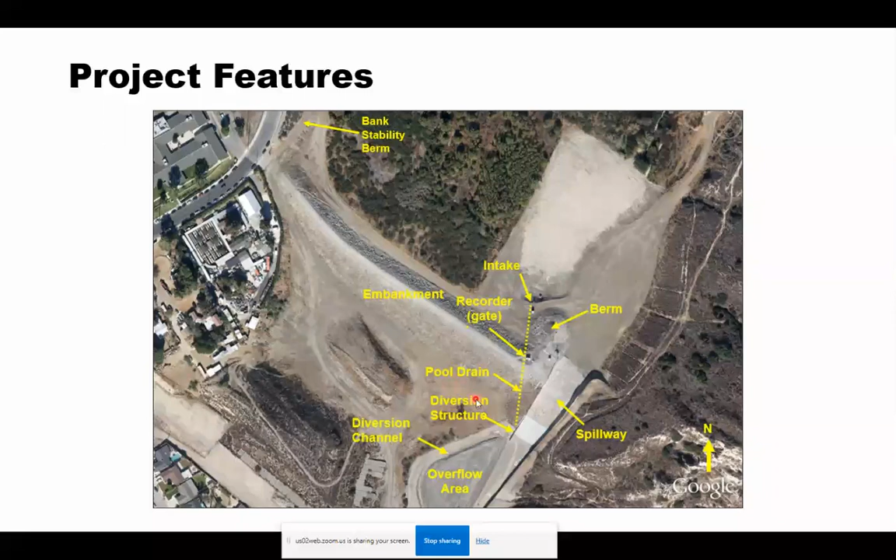Here is a cross section of that embankment. You can see the impervious zone right here in pinkish—that's more of a cohesive material. Then we have a random pervious zone composed of probably a mix of cohesionless and cohesive materials. The impervious material has a PI of non-plastic material to 7, so 0 to 7, so there's some cohesion there. This is going to be sort of a head cutting failure mode, and it could be anywhere from a head cutting to sort of a surface erosion mechanism.

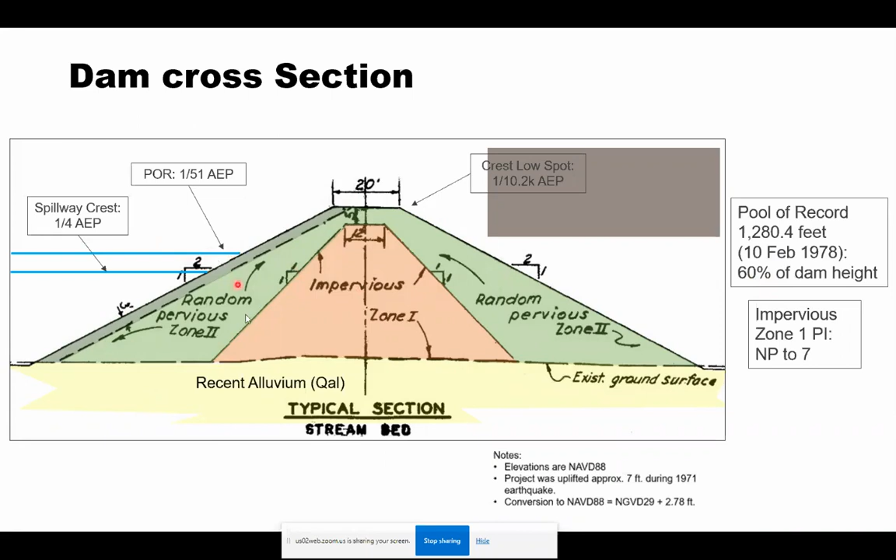This dam has never been overtopped. The pool of record has only been to about 60% of the dam height, denoted by this blue line. Here is a profile of the dam, which basically shows us what the materials are made out of. The crest is relatively flat. Here's our spillway—it's pretty small.

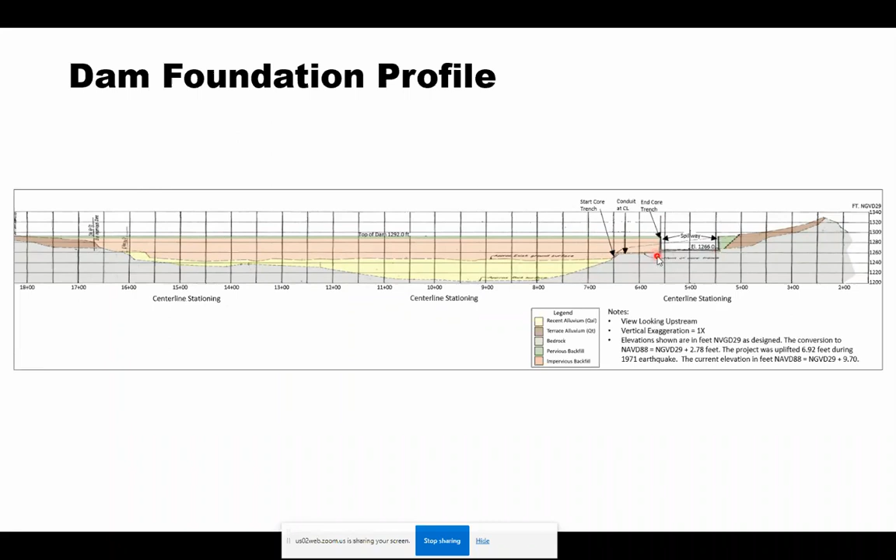So then we get into hydrologic hazard. What we're trying to do is put together all the pieces and parts we need to understand and assess the likelihood of failure of this dam. If overtopping were to occur at this dam, this would be what the hydrograph would look like. This green line is the pool elevation over time, the reservoir elevation. This line right here is the crest of the dam.

You can see if there is a huge event, a huge storm—about 48.4 inches of rain, which is like over a meter, meter and a half of rain, probably over about a 24-hour period—we get some sort of flood that comes down the river, and the reservoir elevation will rise until it rises up above our crest elevation right here. We actually overtop the dam for probably about 3 or 4 hours, up to 3.9 feet of overtopping for probably up to about 4 or 5 hours.

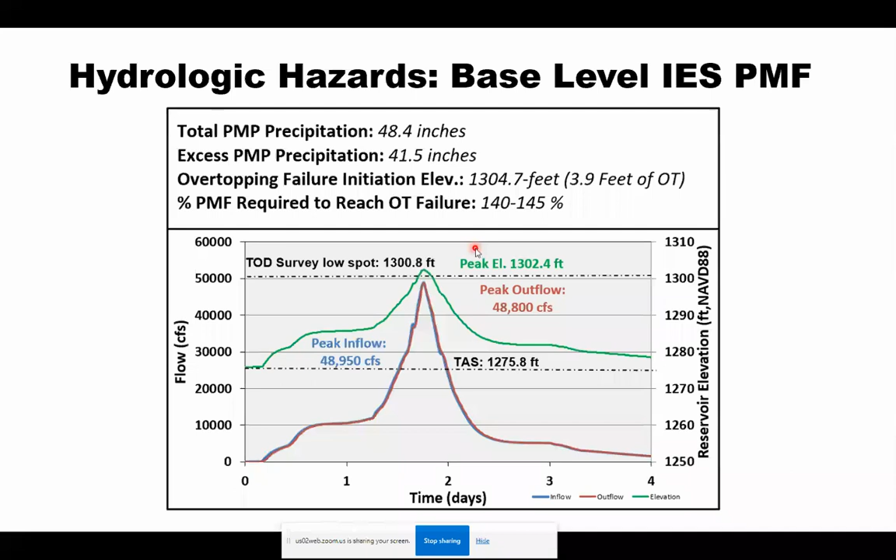So that is our overtopping event that we want to assess the likelihood of. How likely is that event to occur? How likely is it that we get an event that looks like this? We use our stage frequency curve to estimate that. Our PMF comes in, and it's pretty infrequent—about 1 in 15,000. So it's unlikely, but still more frequent than perhaps other dams in other areas of the United States.

So we have some estimates of the probable maximum flood, or PMF. Here is our best estimate of the PMF right here at 1302, which results in 1.6 feet of overtopping, or about half a meter. Our high estimate of the PMF, not shown here but somewhere between the red and blue line, results in about 4 feet of overtopping, or about 1.2 to 1.3 meters.

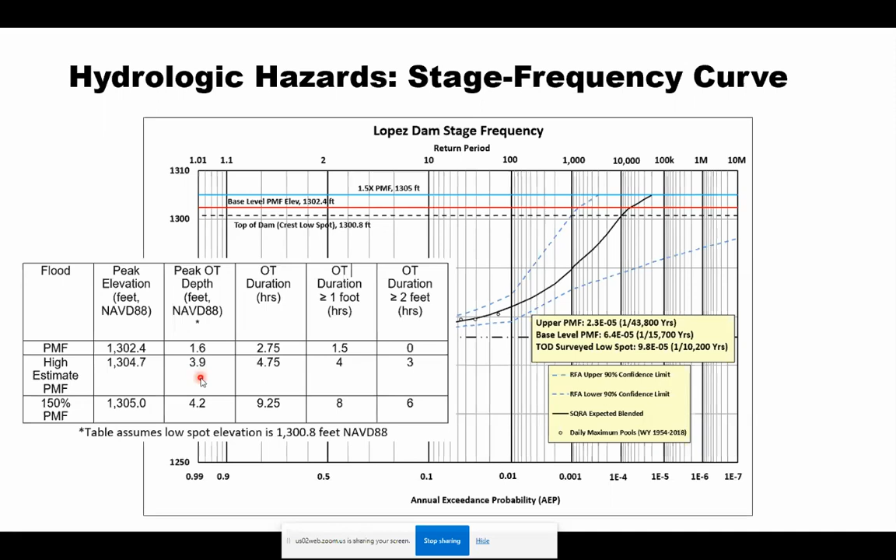So we have an estimate of how much it overtops, and an idea of how frequent it overtops. We also want to understand, should the dam overtop and fail, what are the consequences associated with that. In order to understand how much water will get out of the dam should it fail, we want to estimate the breach parameters. We've done that by running some HEC-RAS analyses that essentially model a dam breach and help us understand how big that breach gets.

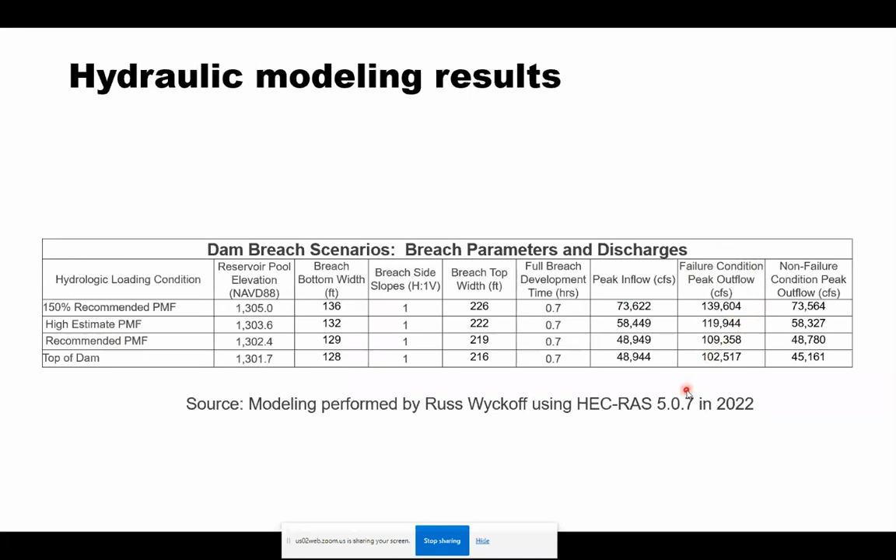So from over 100,000 to 140,000 CFS, again apologies it's not in cubic meters. So we're trying to put all that together, to assess the likelihood of overtopping, and to do that we want to assess the performance.

So now we have our event tree that we talked about before. This is common, we use a similar event tree for overtopping, no matter what dam or levee we're looking at, as long as it's a soil embankment. It would be a little bit different if it was a concrete embankment.

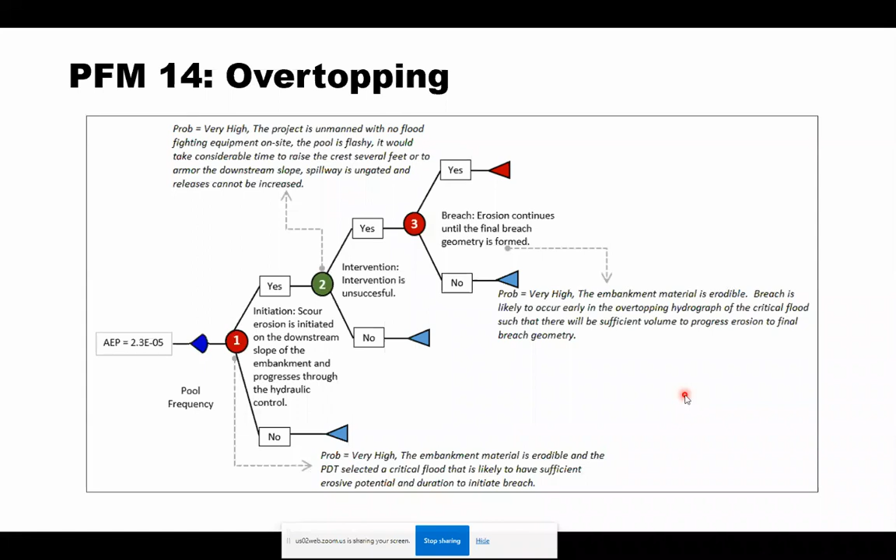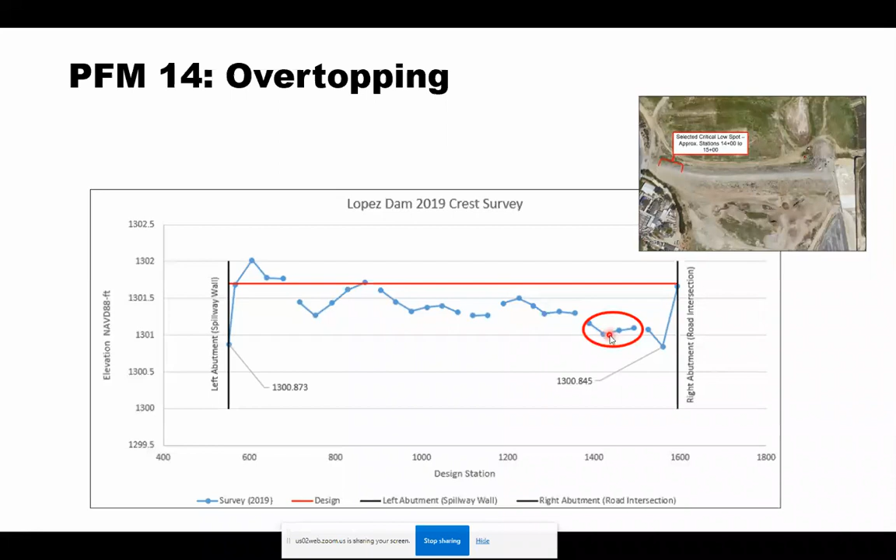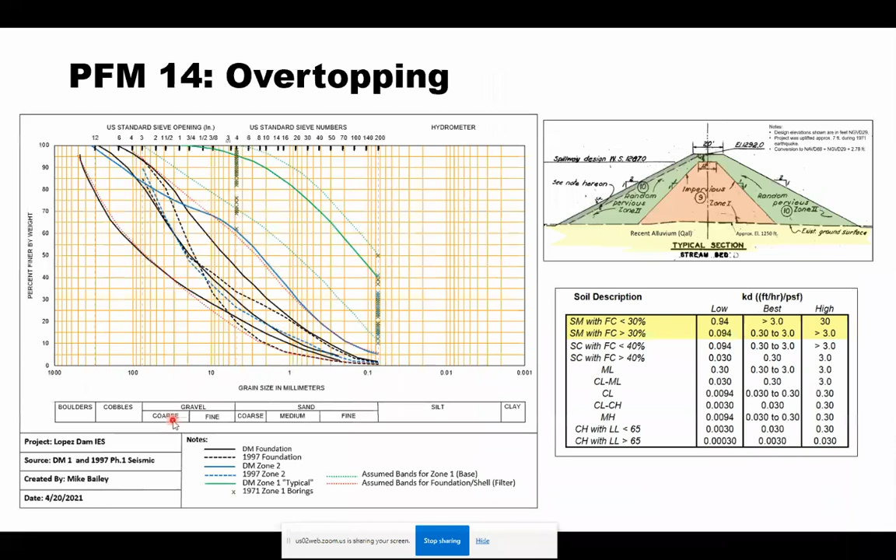And so that was our risk assessment. Then we would talk about the likelihood of that high PMF happening, which comes from our stage frequency curve, and then that becomes our likelihood of failure.

So we based our annual probability of failure on this: the risk assessment team selected the critical loading likely to have a system response probability of 1, or a likelihood of failure of 1. So what flood event would it take to actually breach this dam? The team considered that the embankment is highly erodible, it's a silty sand, but because the duration of overtopping was relatively brief, somewhere 3 to 5 hours, it was going to take a little more depth of overtopping to get this thing to actually fail. So we came up with about 1 meter of overtopping.

Significant sources of uncertainty: lack of observed systematic H&H data, so we don't really know how likely it is for this overtopping event to happen. We don't have a lot of confidence in that. Same with the second one — pretty much the first three deal with the likelihood of the flood event itself. The last one, we don't have any lab testing to actually tell us the real erodibility of this material, so we're estimating.